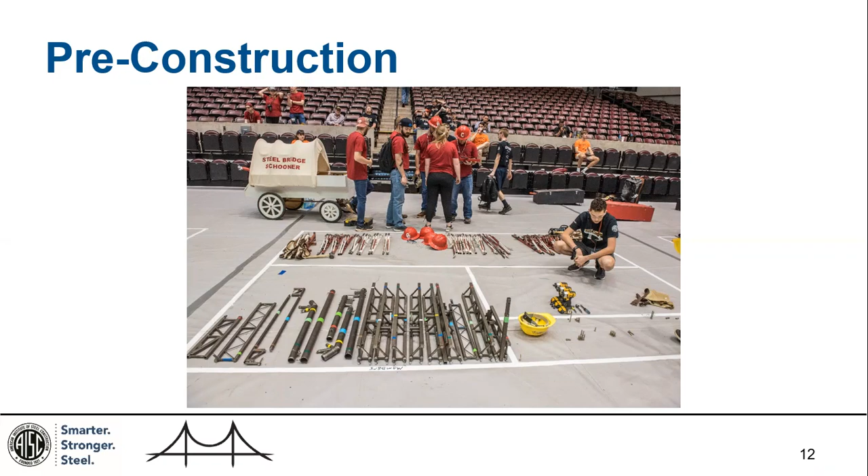Once you're done with the pre-construction checks, you'll move into construction, tracking the time it takes to build the bridge. You'll be tracking accidents; see section 10.4 for accidents. This is a photograph of a bridge being built over the river area, and you can see how cautiously the builders avoid touching the tape and stay out of the designated river area while they stand in the construction zone.

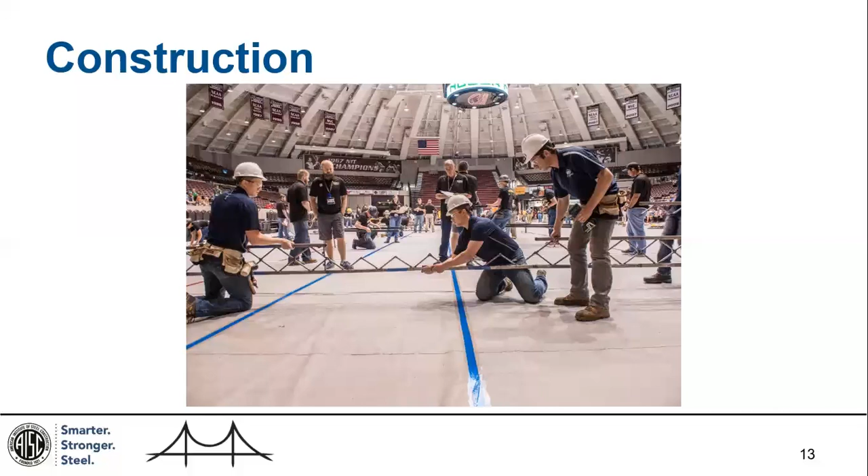After construction, you'll move into post-construction. You'll have your tape measures, rulers, and levels, and any handmade templates you may have, checking for dimensional requirements and also for any connection violations. See section 9.3. Students will also have an opportunity to make any corrections if needed. See section 9.4. That's pretty self-explanatory.

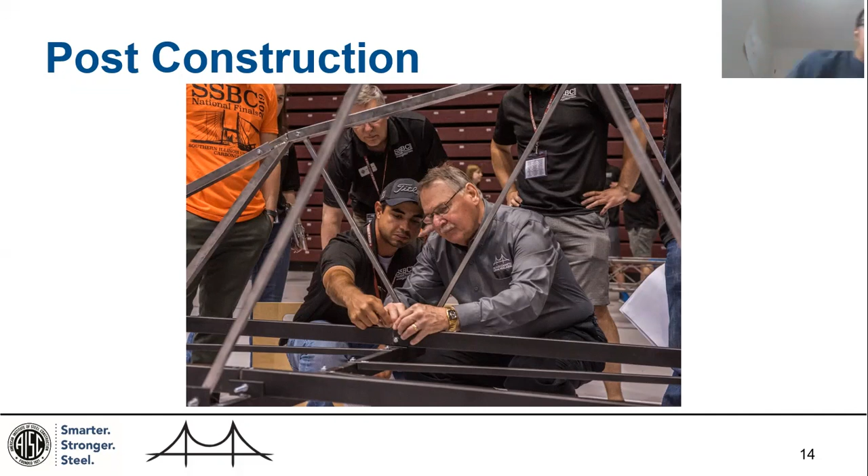It's not our responsibility to do aesthetics this year, as opposed to previous years. So this is just a one-off, a friendly reminder that after post-construction there are some aesthetic requirements the students are responsible for, and some photographs that should be taken after post-construction, before loading.

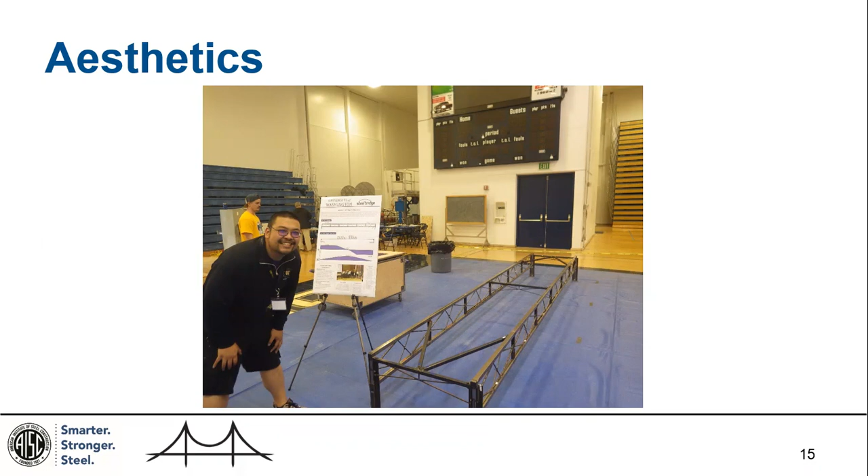Okay, then comes what a lot of people think is the most exciting part of the bridge competition: the loading. We'll see a 50-pound lateral load, see section 11.4, and 2,500 pounds of vertical loading in section 11.5. After the loading, you'll move into the weight section and the scales.

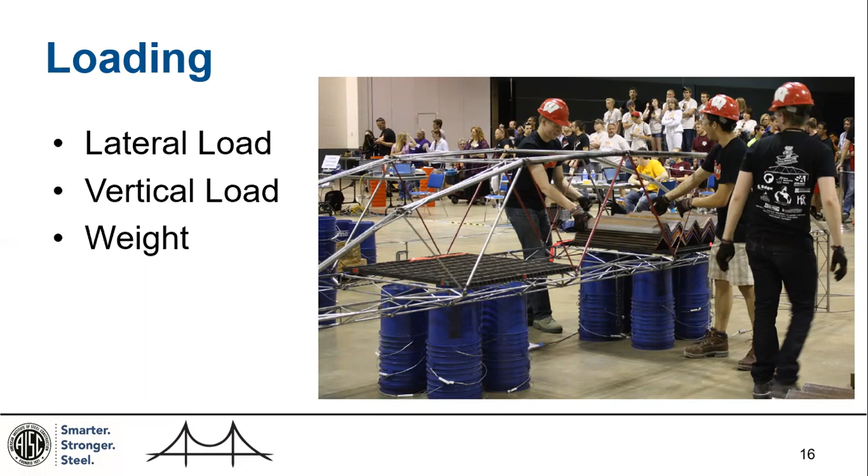We have provided a list of basic items that you will need to judge this competition. I'm not going to cover every item, other than to say that the loading weight can be any material or combination of materials, and that the bearing plates we show are only required if the bridge will be loaded on a compressible surface.

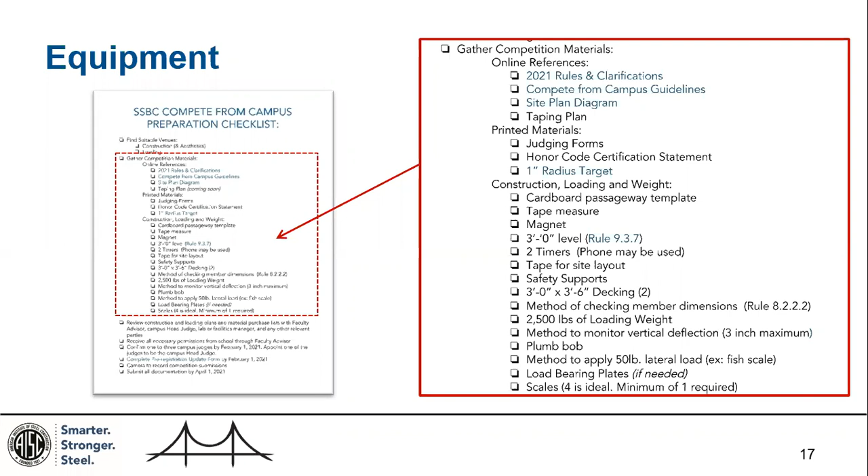Before the competition, you want to check with the host on templates, plumb bobs, and any other equipment you may need. You want to confirm location and time. And if the competition is going to be outdoors, make sure they have an alternative date in mind in case of inclement weather.

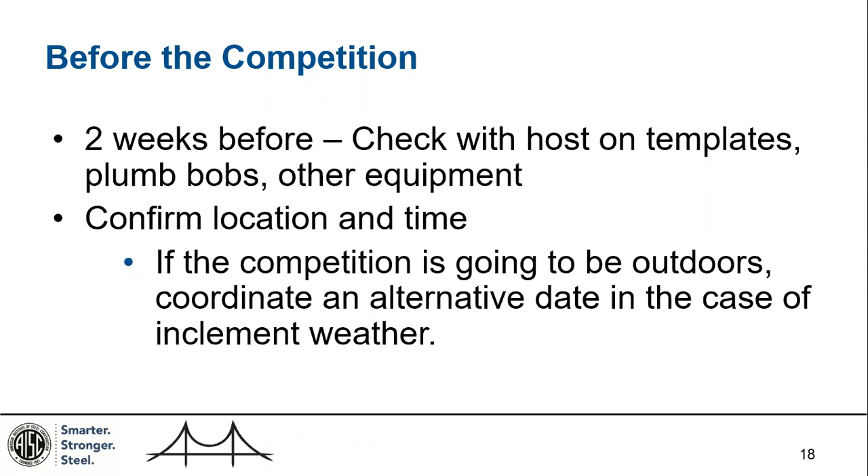Make sure that you and other judges have read the SSBC rules and the Compete from Campus guide before the competition.

This is your captain's meeting. You want to meet before the competition and have the captain try to refer all questions to a rule number, referring to clarifications before answering a rule question. Let the team know this will be the only time questions will be answered; they cannot ask or answer questions during the competition. This meeting can happen at any time before the team starts staging their bridge. Please do not pre-approve a design or construction sequence. We'll provide a link to the clarifications later in this presentation, and remember to never give any advice.

During a competition, you only talk to the team captain. Again, do not answer any process questions after meeting with the captain at the captain's meeting.

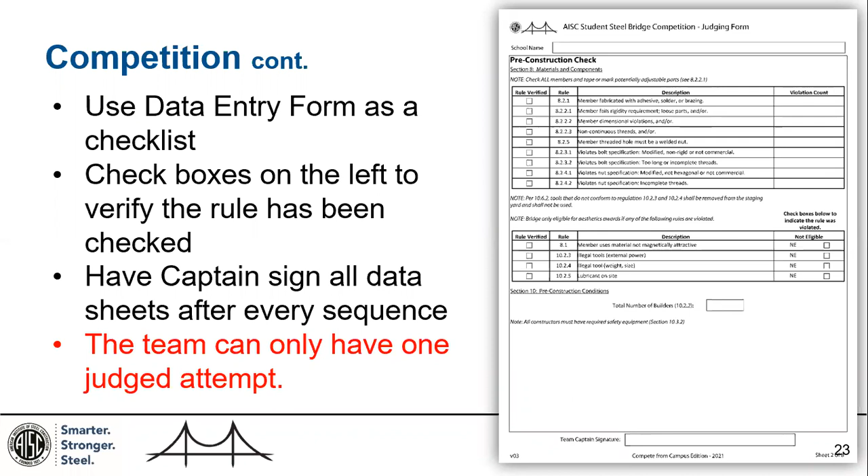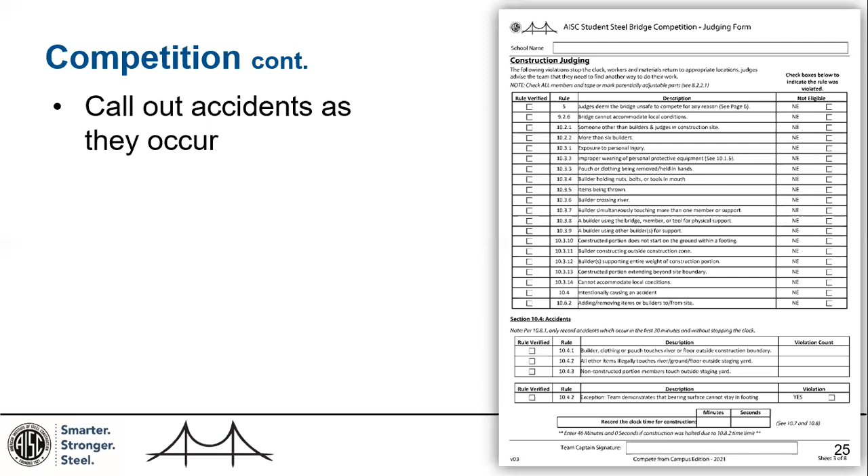This is the post-construction phase. These checks happen after the team has completed construction of the bridge. There are some measurements that use the floor, so make sure the surface is as flat as possible. If there is a concern, use a string line between the footers to ensure an accurate measurement.

Remember, if the bridge falls outside the measurement envelope, it should be penalized. You can touch fasteners to ensure they satisfy Rule 9.4.4, but do not turn the bolt or the nut when checking. When complete with your inspection, make sure the team captain signs the sheet before moving on.

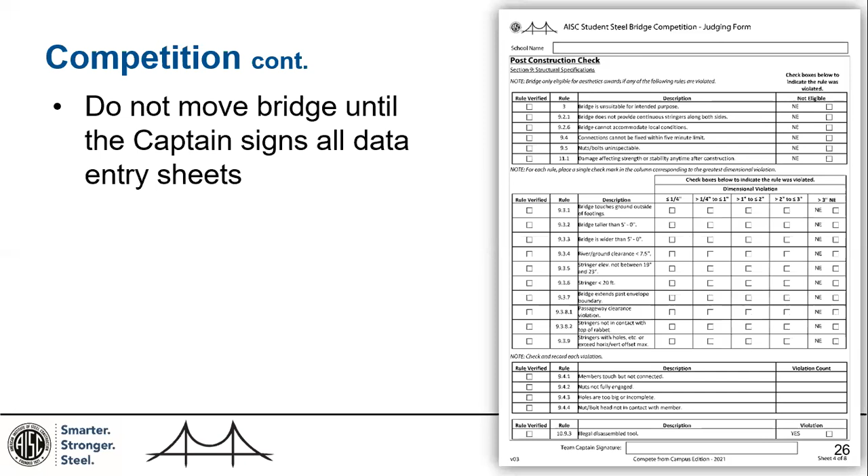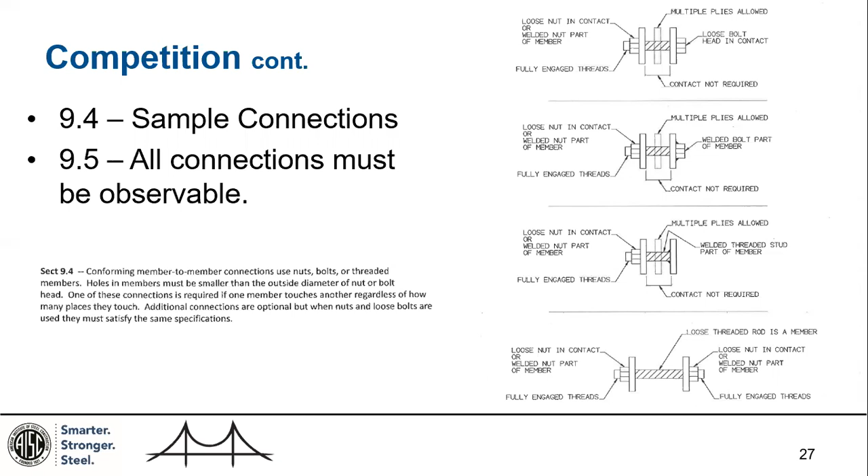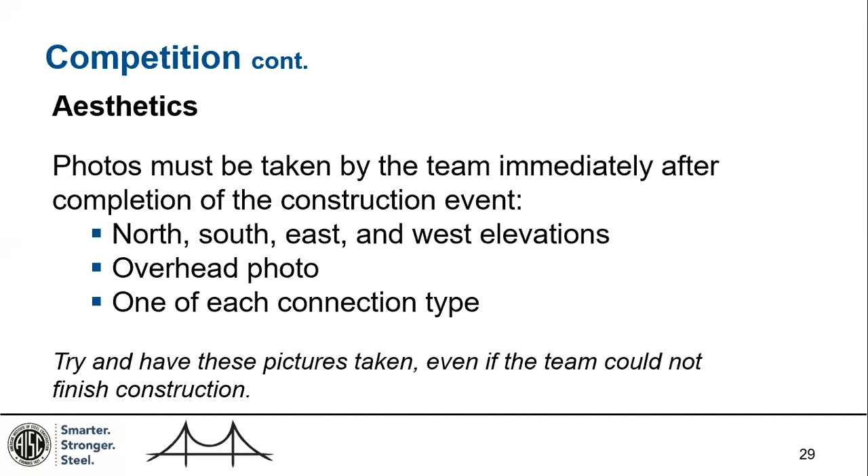You will need to use a plumb bob and a 1-inch radius target to monitor that the bridge does not sway more than the 1-inch maximum when loaded. You will enter pass or fail depending on the outcome.

Vertical testing. Up until now, the rules have been the same as past years for construction and lateral testing. This year, for safety reasons, and also recognizing that each school would be using a different method to measure deflection, we decided not to have a judge record the amount of deflection during vertical loading. Each method would have had varying degrees of accuracy, and this would have made the comparison of this data for ranking teams in a region impossible.

However, there is still a maximum deflection limit of 3 inches. This is now a pass-fail test. The bridge has passed if it holds 2,500 pounds and does not deflect more than 3 inches.

Also, for safety reasons, we are not directly monitoring sway, but you should observe the performance of the bridge during loading and stop if the bridge is deforming or swaying in an unsafe manner. Note that if the bridge fails when unloading, it has not passed the vertical load test.

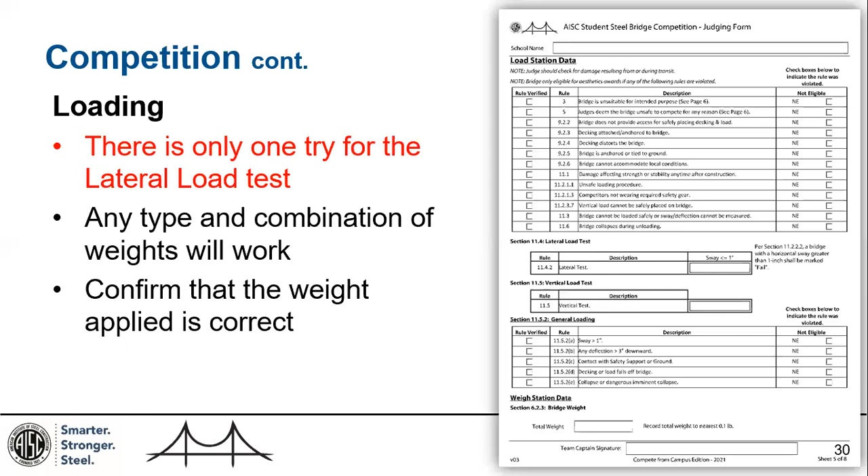There is only one try for the lateral load test. Any type and combination of weights will work, and you want to confirm that the weight that has been applied is correct.

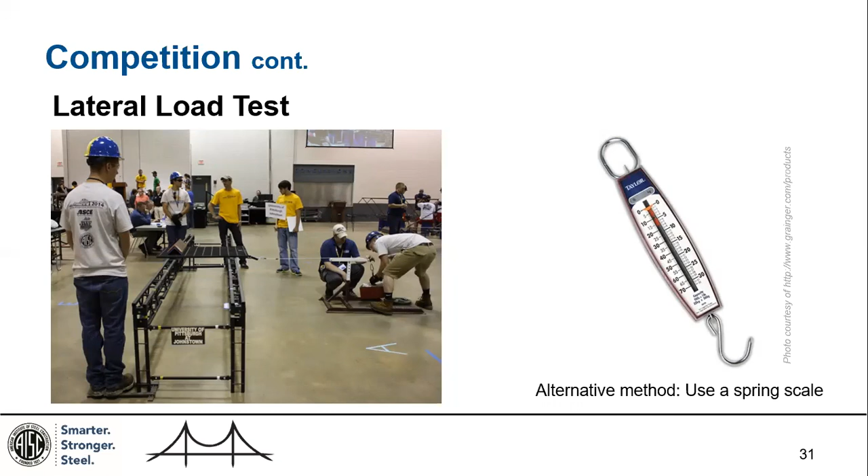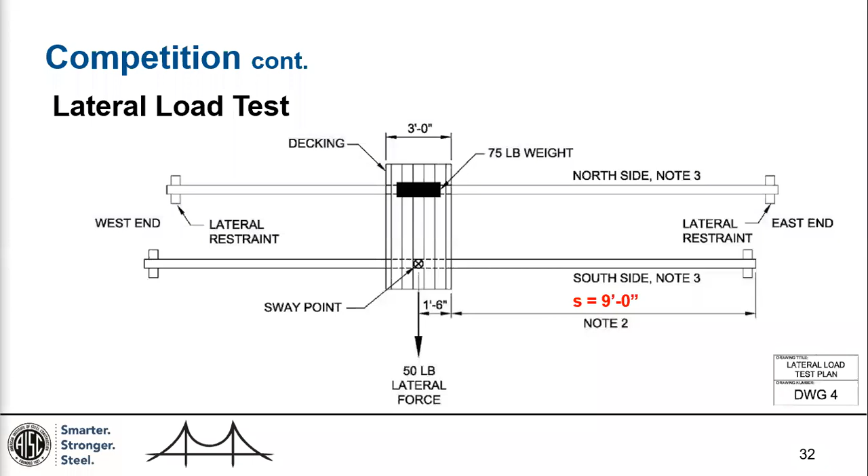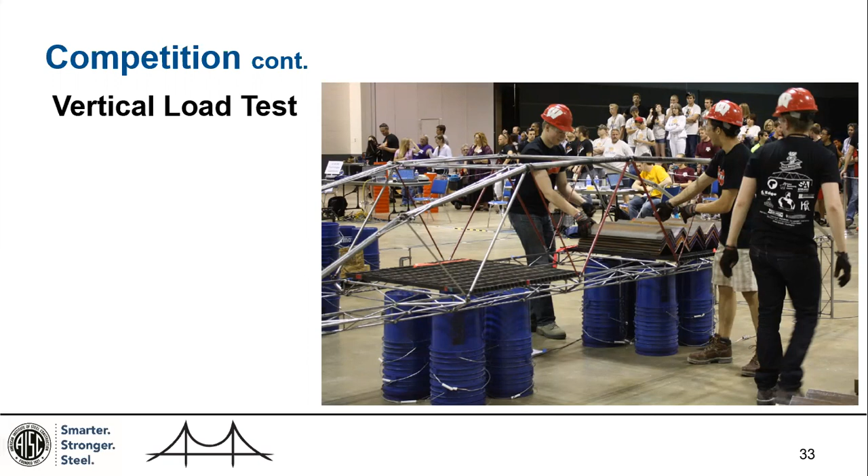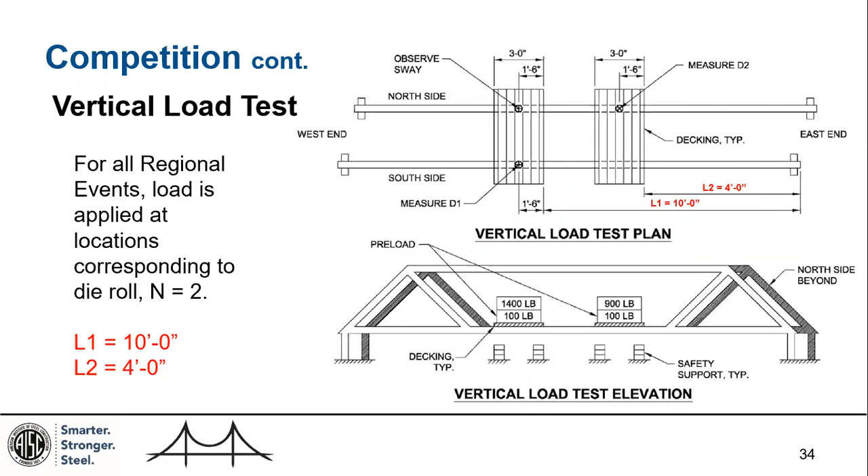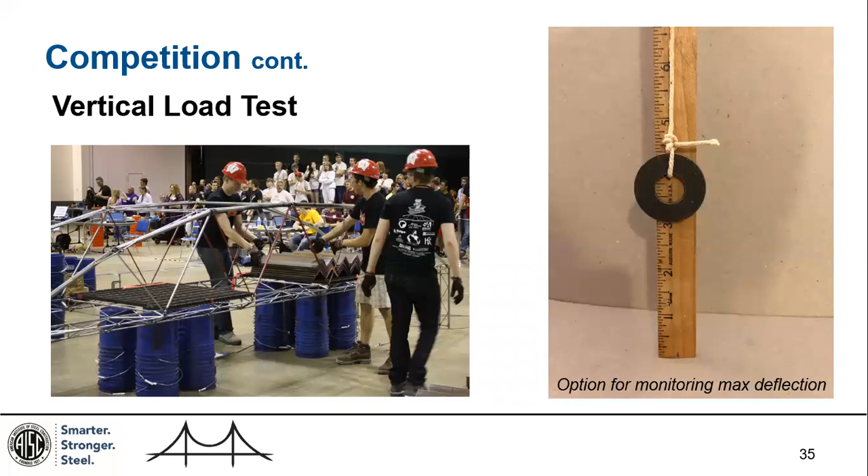Weighing of the bridge. It's ideal to have 4 scales, but not necessary. If there's only one scale, the weight of the individual members, loose bolts, and nuts can be combined. Try to weigh the bridge, even if the bridge cannot finish construction or loading.

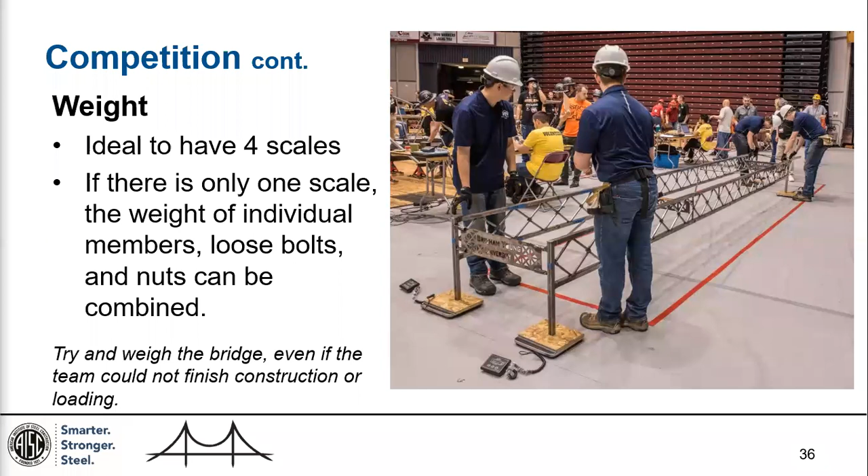Appeals. There is an appeals process for unresolved issues. You want to refer to the Compete from Campus guidelines. Filing an appeal is the responsibility of the school. The team captain must advise you, the judge, by the end of the competition of any issue that may be appealed.

Try to take pictures of the issue for further review, and you may be contacted by the Rules Committee for clarification. Remember, only talk to the team captain about this issue, and you can try to let the captain know how and or why you made your ruling. Other than that, let the team file the appeal, and the Rules Committee will make a determination.

Wrapping up, remember to take your time. Do not amend the rule, and remember that a measurement that exceeds the range must be penalized, and that teams have only one judged attempt. Safety is very important, and you want to try and keep it fun.

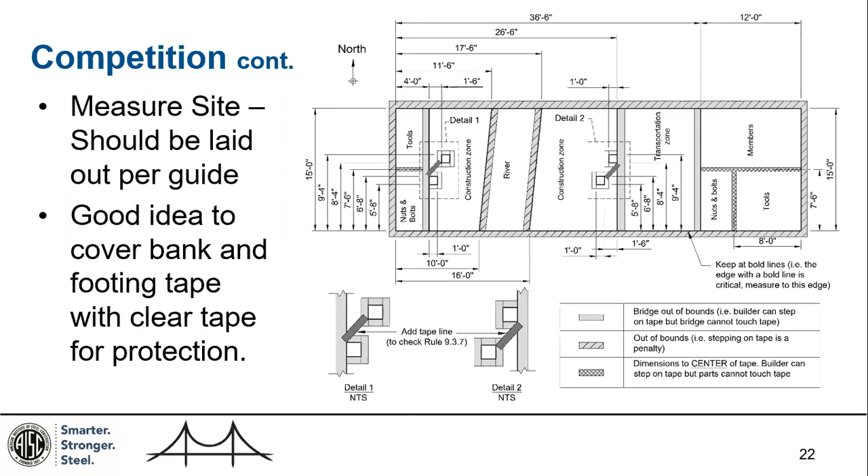You can move this template sideways in that 2-inch wide rabbet in order to make sure that you're not going to be hitting an obstruction. So if you have a bolt head sticking into this, you can slide the template over to get around it and still stay on the deck support, that's fine. But it is slid along the whole length of the bridge from end to end.

Okay, great, thanks for the clarification there.

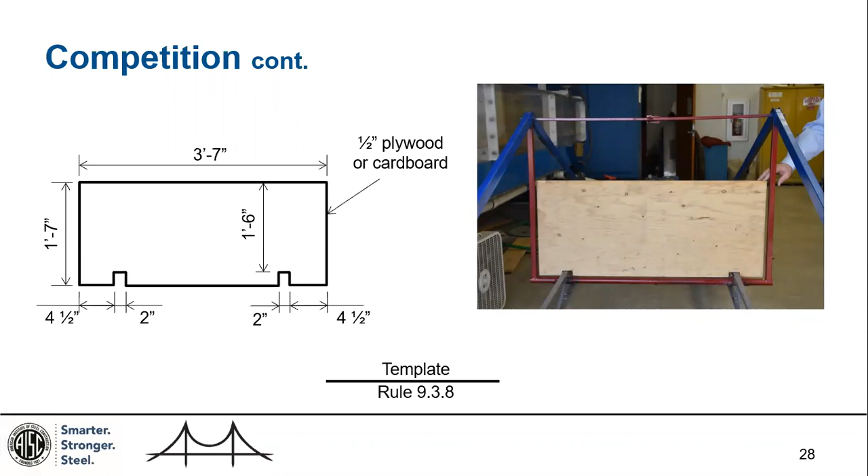The next question is, will there only be one competition, or will these be evaluated per region and then for nationals? So there will be regional events like we typically do. The collection of schools will be divided into different regions, and then the top qualifiers will advance to a national finals, where they will compete again from their own campus in a very similar format with a different die roll. So they'll have to do the construction portion again and load test their bridge, and then submit their judging form and videos for that attempt to compete at the national final level.

The next question is, how are students expected to take an overhead photo of the bridge as previously mentioned? Are students expected to have a ladder, or can they hold a camera above their head at a downward angle? I would say use the most convenient method you have. If you can stand on a chair safely, whatever method is safe for you, there is no specific requirement for that. We just want something looking down as best we can to the top of the bridge.

Okay, great, no need to hang from the rafters. All about safety first, right?